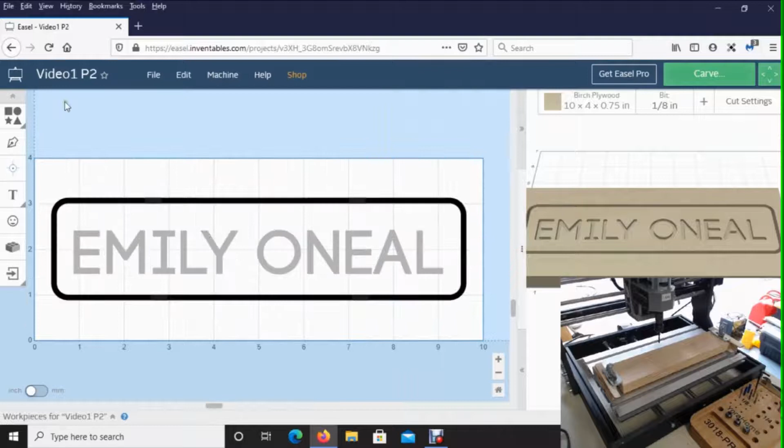If you look over here at the screen, let's move this over, click home, and go ahead and change our size. So I actually have a 10 by 2.5.

So what we're basically going to do is take them, edit, and center in material. So now basically they are in the 2.5-inch range. Going forward, you may have to do the same thing if you find that you don't have the wood that you thought you did.

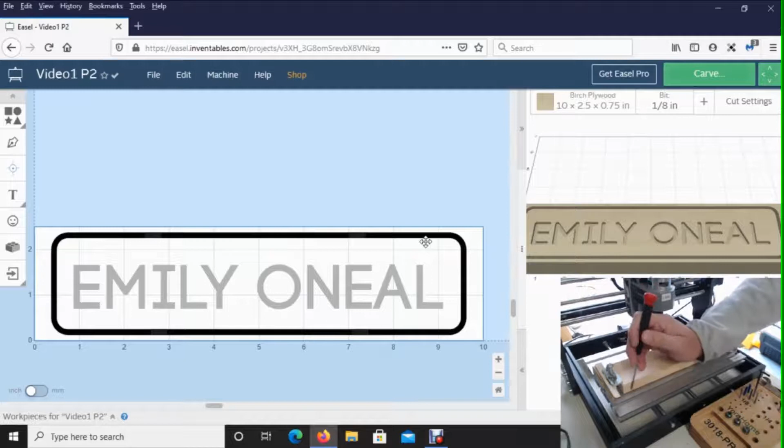One thing I want to note is that we are drilling through this. Remember, the outside cut - if you look at the screen here - we're going to cut all the way through the material. Let me make this bigger for you.

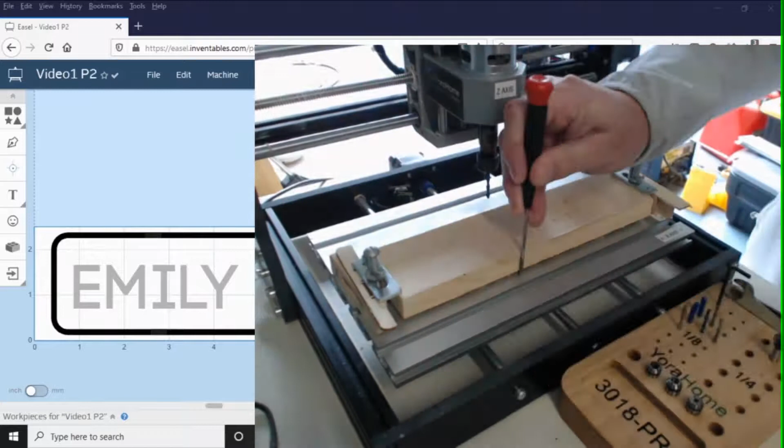Basically, we want to take our bit, line it up right here on the corner, and I have one of these underneath there so that when we drill through, we don't hit the spoil board. Then basically clamp it down.

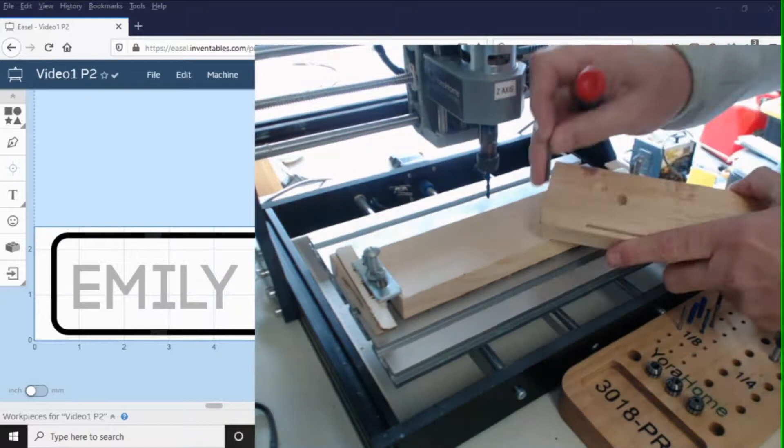One thing I want to note is when you line up your bit, you're going to want to make sure that you get your bit directly on the corner, so the center of your bit is dead smack on the corner of that board. That's pretty much what we're going to do.

And so let's go ahead and move this over. I'm just moving it down a little bit - you won't be able to see. Actually, you know what? Let me do this. Let me go left. There we go.

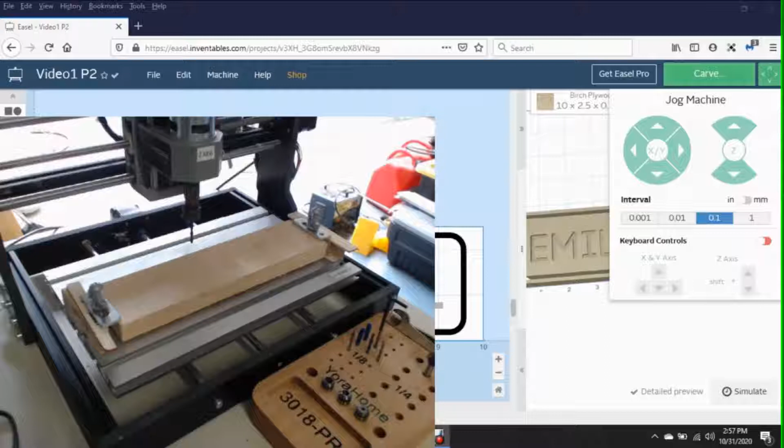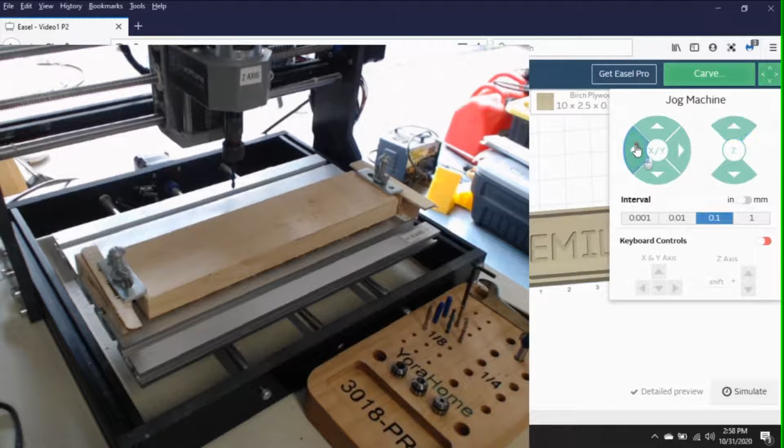All right, so now I'm going to make sure I raise it up, and then I'm going to just move it over. Moving it over - sorry, I had a little glitch, a little squeaky squeaky. Coming forward, basically I'm just going to move it over till I hit this corner right there, dead smack on it.

I'm going to lower my bit a little bit to get a little closer. What I like to do is turn the bit so the blades are facing like this, so you can put the wood dead smack center of that - that's kind of what you're looking for, dead smack center. So this will be right - this way is perfect, which is the y-axis, but the x is not.

I need to come down. Actually, that looks pretty good right there. So it's dead smack perfect on it.

Another thing - just so happens that this particular project, my clamps are very close to the board. I actually should have gone a little bit larger to give me more room to clamp on it, but I didn't - I cut this one kind of tight. So we're just going to make sure we're very careful and don't want to hit the clamps. When it comes around to that time, if we do, we'll just stop it and readjust it.

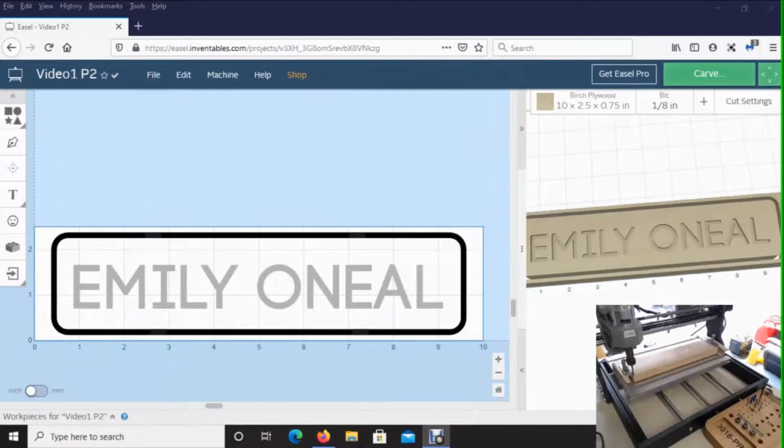Let's click away here. I'm just going to leave this open. Actually, no, let me move this down here, put it back to the right. Then I'm going to click carve. Actually, I'm going to move it to the left again, leave it over here for you.

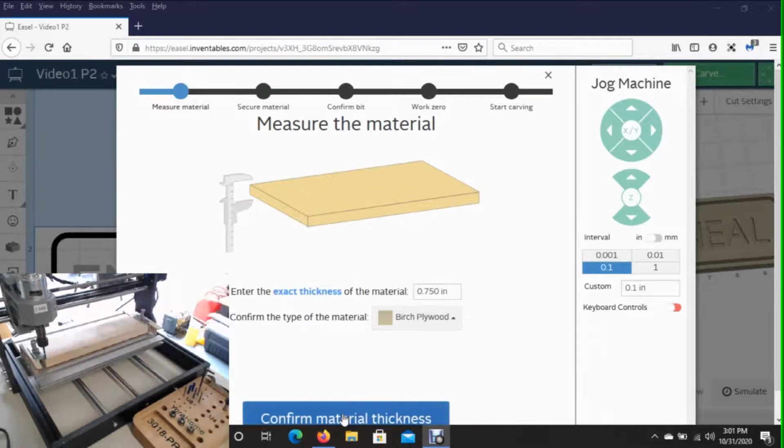Okay, so the material is 0.75, which it is. We are now 2.5 instead of what I originally thought. Material thickness - we don't have to jog the machine because we have it exactly perfect right there. So confirm material thickness, material secure. I do have an 1/8 inch upcut bit, which is what we did on the design, and I've already got it in there.

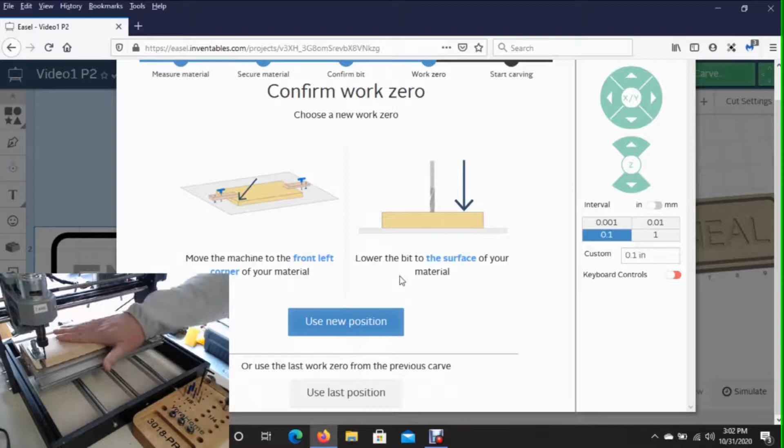So it wants to know, am I at my 0 position right now? My answer is yes, so I would use the new position. If I had already wanted to change a bit or whatever, I would probably use last position, but that'll be something for a whole nother thing. I have it right where I want it, so we're going to use new position.

Basically, when I push go, it's going to raise the bit. You tell it to turn the spindle on, and then when it's on, you tell it it's on, then you click carve, and it goes for it.

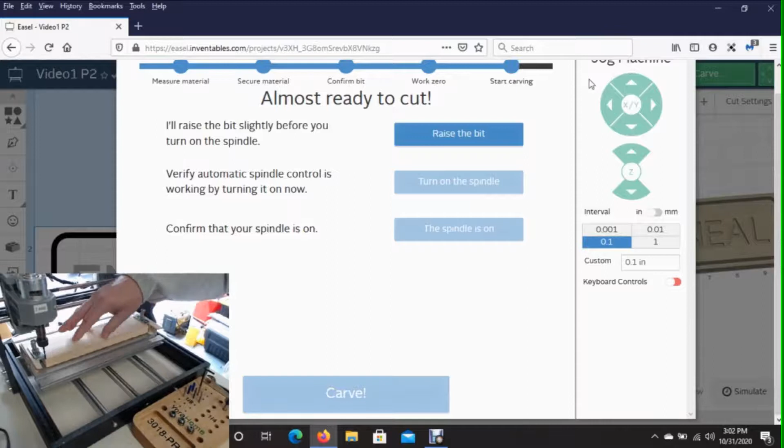Now, one thing I do want to mention is at the top right-hand side of my screen, you'll notice it comes up and you'll have the option to change your feed rate. I like to immediately be ready with that, because if this bit goes and starts just grinding in this wood, I'm going to want to stop it or slow it down, because I don't want to break the bit or damage the machine.

So I'm going to go ahead and turn this on, and I'm probably going to mute the microphone so you don't hear all the racket, but let's give it a try here.

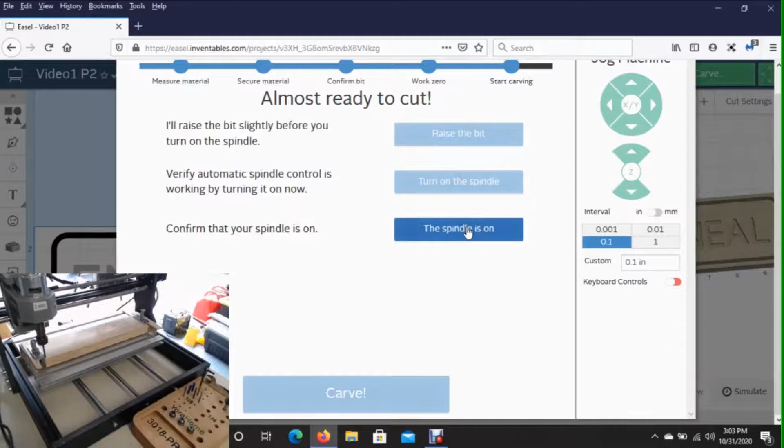Raise the bit, turn it on, spindle's on, and go. So you'll notice up top here my feed rate is on 8. I'm ready to slow it down if I have to.

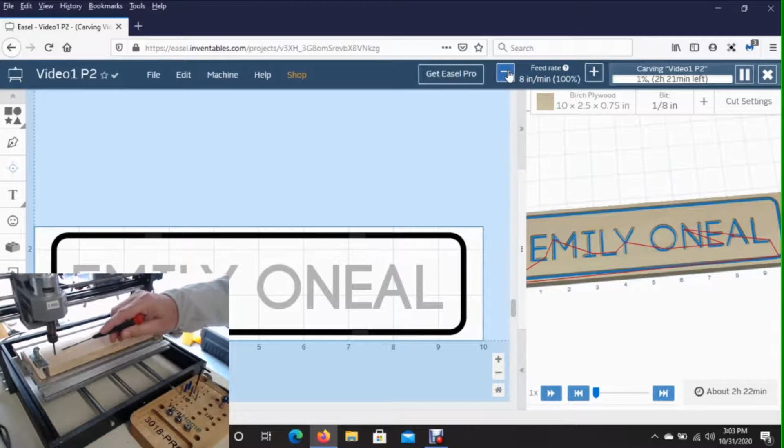You'll notice that the very first cut is not very deep, it's very shallow. The second cut's going to be a little bit deeper, but it's not going very fast, and I actually could speed the feed rate up a little bit. I might go up to 9, and I probably could go a lot more.

So let's let that cut for a few minutes. I'm going to let it cut out the letter E, and then I'm probably going to pause it.

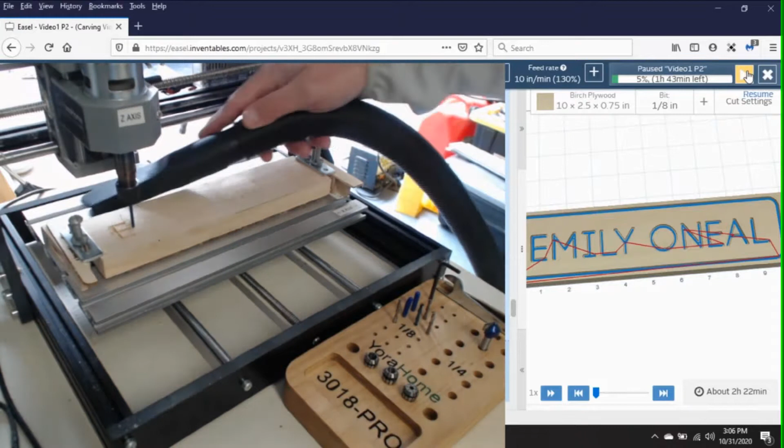So just real quick, the letter E is done. As you can see, I've adjusted my feed rate up a little bit. I like to start low and then work my way up, because you don't want to start high and damage the machine. You can always go a little more aggressive, and I still have another 70% that I could go. So I'm going to let this cut, and I'm going to pause the video until we get done the letters, and we'll come back for the frame.

We are done. Let me just vacuum this up real quick. Okay, so here we go. We got her done. Let me go ahead and raise this up, get that out the way. Got her all vacuumed in.

Oh yeah, oh, it actually just broke right off. So as you can see, the little tabs that held it in place - there's 4 tabs - and they were so small that it actually just broke right off.

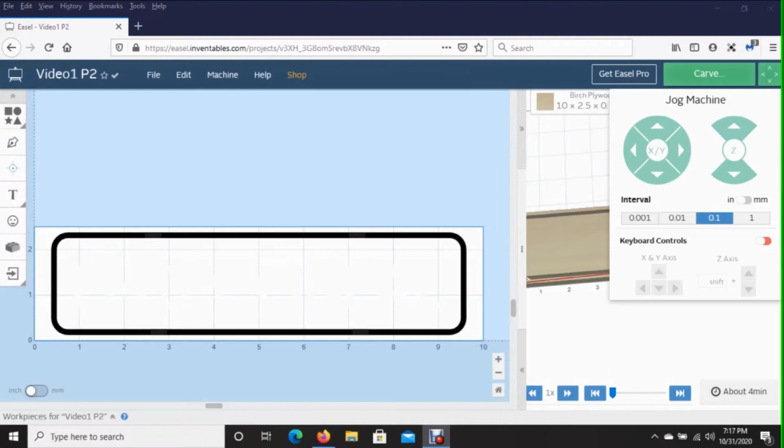So I'm just going to sand them down, and there it is. I'm going to sand them real quick. So let me turn this button on.

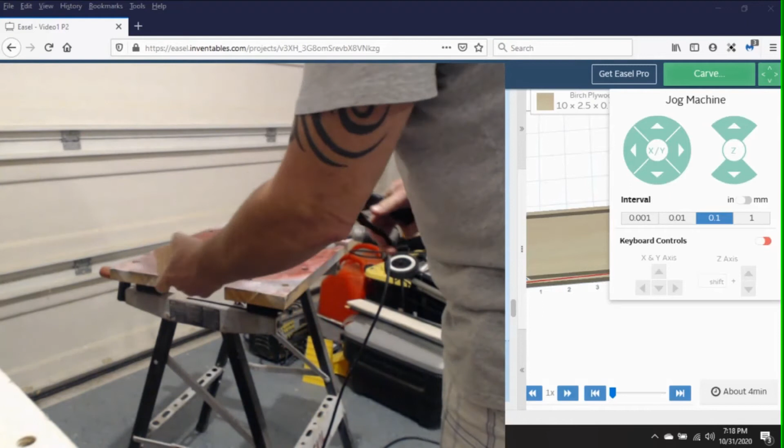And as you can see, beautiful, nice and smooth and clean. And that's her. Then I'm going to airbrush it. I might actually do a separate video on that, called finishing it - airbrush it, sand it, shellac it. But that's her. I hope everybody learned a little bit.